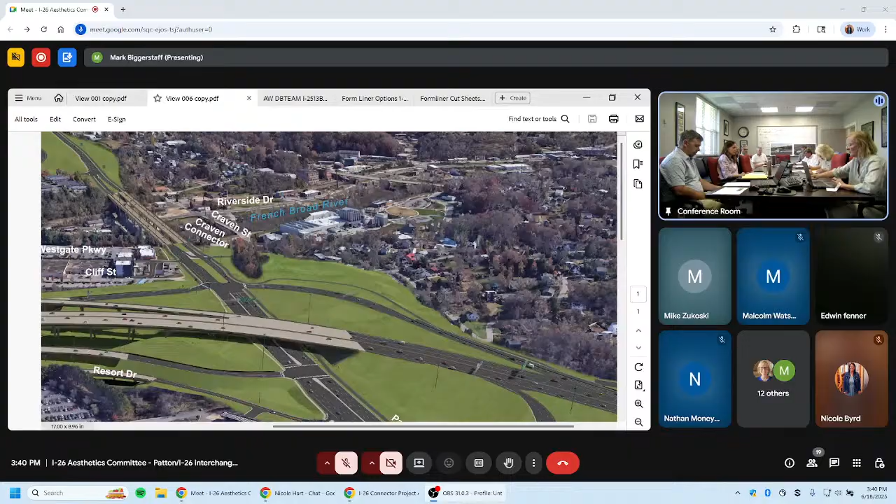He says it's basically a laser cut scrim in front of the beams. So I wanted to pull that up, have the committee take a look at it, have NCDOT and Archer Western react to it and see whether that is something that is a potential without too much cost.

Hold on, because I had Mark's got Jessica's thing, so, Mark's got, okay, it's good, here. Okay.

To clarify, those pictures were in the Archer Western joint venture proposal under the documents describing ATC 4, which is the big one, the flip where they were. There's about 30 pages around ATC 4, and this is one of them.

My question on this is, I think I understand what laser cut is, but I'm not sure I understand what a scrim is. Is that chiseling into concrete? I have no idea. Are you familiar with that? No, I'm on the same sheet of music as you on the terminology.

If I would interpret it the same way as we had the unofficial discussion, I think it's laser cut metal. That's how it looks if I was to build it, that's how I would do it. You blow it up a little bit for us.

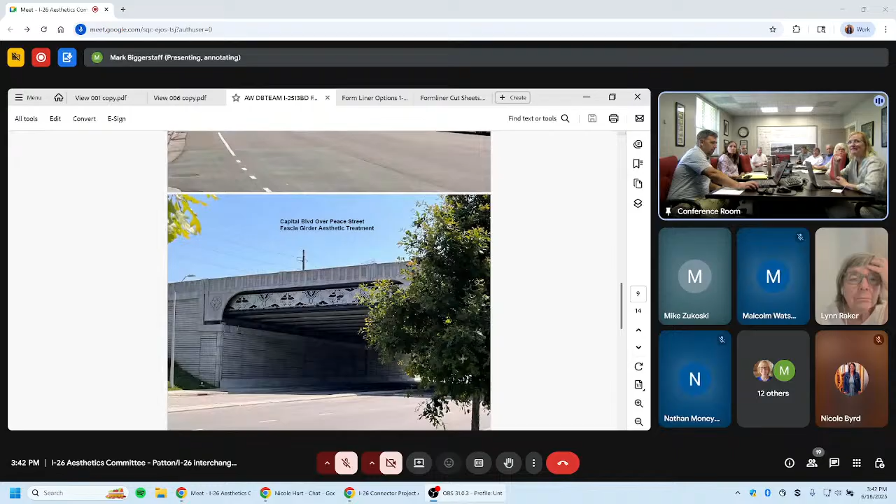So the intent there, and how our AJ designed it, I can't speak to since I wasn't involved with the process at that time, but as intricate as that is, it would have to be CNC laser cut. I'd do it out of some kind of aluminum, maybe, and it would be bolted to the exterior girder or hung in some form of fashion.

Okay, so almost like a skirt, a design skirt. So would that change anything about the basic kind of structure behind it that we've been discussing, in order to do something like that, assuming the city wanted to do that? The simple answer is no, if we're only talking about what I'm calling the metal work.

There's a lot of elements in that rendering right there. I mean, the whole thing, obviously we wouldn't necessarily be adapting this design exactly, but looking at the whole thing, what is it that we would need to do structurally in order to make it possible to have something that looked like that?

Those cheek walls are custom, the ones going down to the left, where you have that medallion, I'll call it, on the left, right? You're already proposing form liner on that exterior wall right there, so I think you're already addressing that.

So it's more like bolting that metal to the girder, which, if done the way I'm describing, would not have a big structural impact. We're not talking about doing anything in the girder yet, this is a new idea. We're only talking about the, I love it.

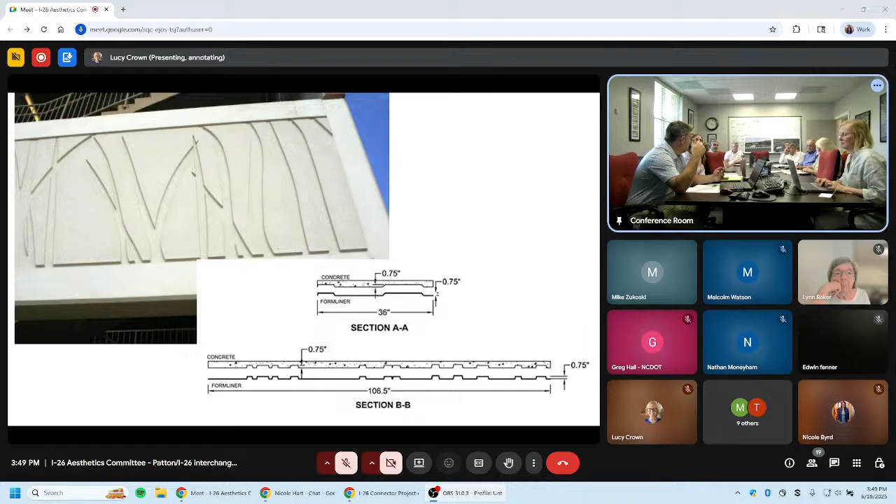Before we get into them, there are some stipulations I'll hit on, but I found out on the barrier wall we can't adjust the height, really any, because it's a design-standard tested barrier wall shape. So 42 inches is what you got. It's not a complication with any of these you've chosen - 1.5 inches extra thickness is all we can do without getting into structural changes with the bridge design. But my understanding is these 5 are good from that aspect, so we got pricing on them.

I don't know if you want Span B, the total Span ABC, or I can go through - basically what I've done is taken their pricing for all 3 spans, pulled out the 235,000 that DOT had estimated for our standard with stain, and have a delta, which I think is an important number to y'all. Most likely Span B covers the extent of both lanes - yeah, Span B, you basically have a bridge column on each side of the Patton, and Span B is that section between those 2 columns.

I'll just start with ABC because that's the 235 reference. The Western Range Grass is 283,364 total, so that's a change of $48,300 more than the standard for all three spans.

That would be the city's obligation, are you saying? Yes, unless it's a contingency item - never mind that. Arizona Zigzag is 17,947... that one, again dealing with all three spans, is a complete switch-out of this pattern instead of a standard for all three spans. It's $32,500 more for that pattern.

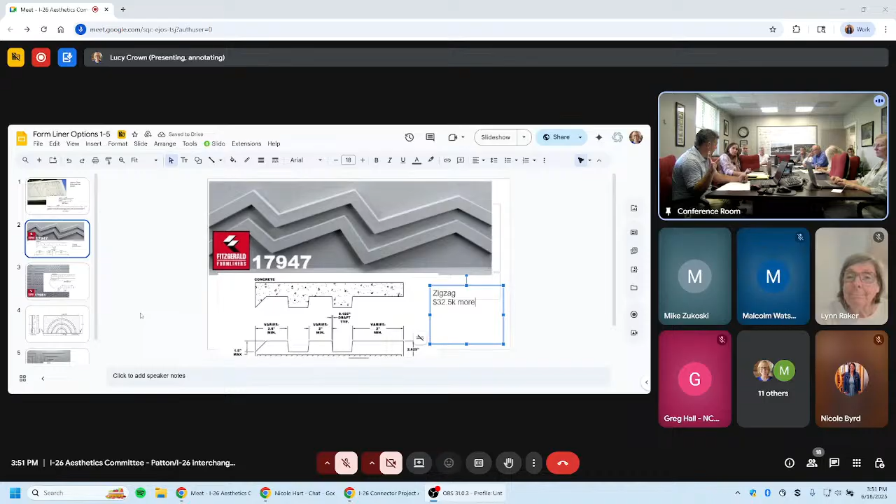That is not with a stain on these patterns. I've got a separate number for that, but didn't know if y'all would go with a stain or not, so we've got it separate.

17951, California Art Deco. That one is $75,400 additional. You have expensive taste, Ted. Yeah, what's this one called? California Art Deco.

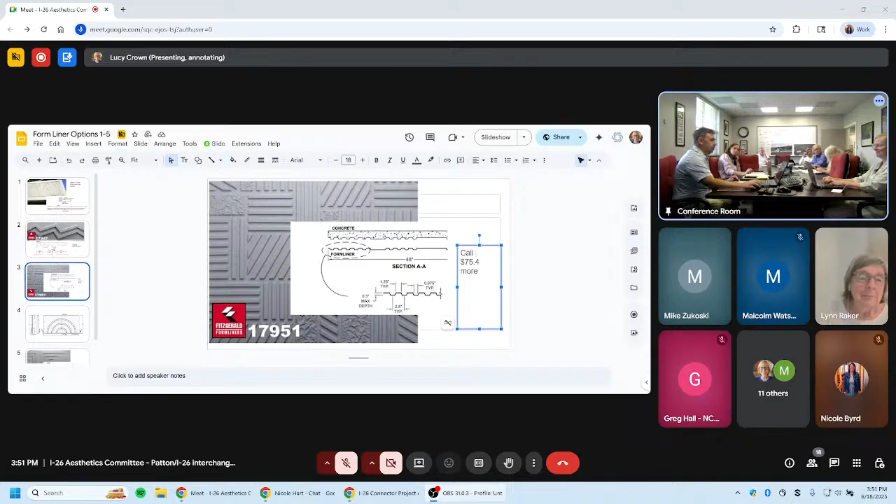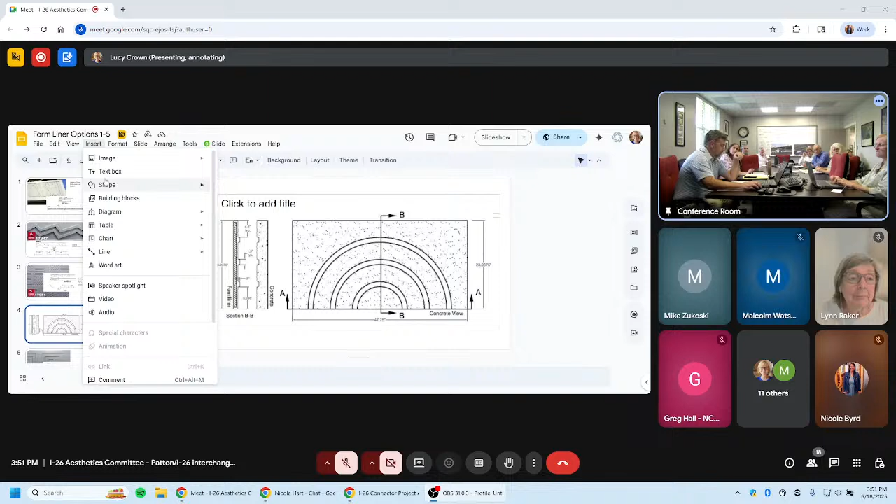And I've got some cut sheets that the contractor pulled with these that are a little more detailed than this, I can send over to you. Buttress swirl, that one the additional cost is $34,600. And I'm rounding some to make it easy.

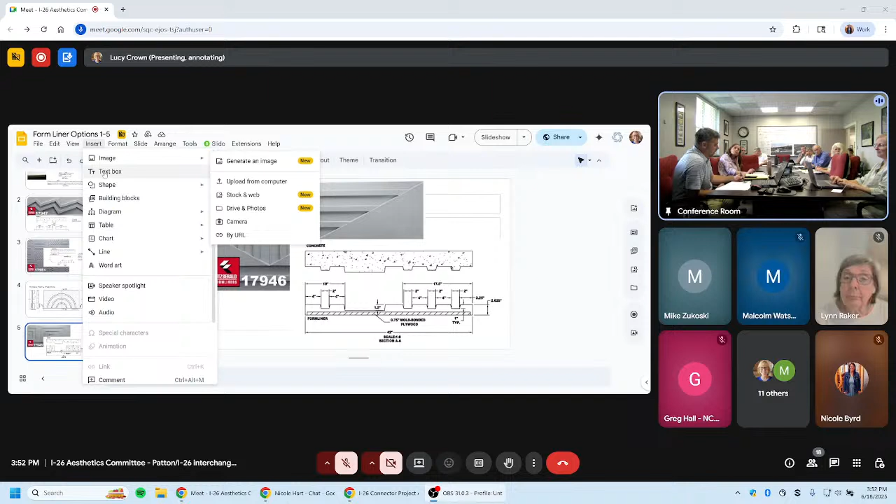And that one is $74,400 more. Could you repeat that? 74,400. Does this one have a name? Yes, Arizona Santan. Same thing.

So the 2, 3, 4, and 5, that's for all three spans, and the first one was just for span B? All the numbers I've given are for all three spans currently. Okay, just that's, I guess, worst case in my mind, dollar wise. So we're looking at 32.5 to 74.4. Right, yes, 75.4.

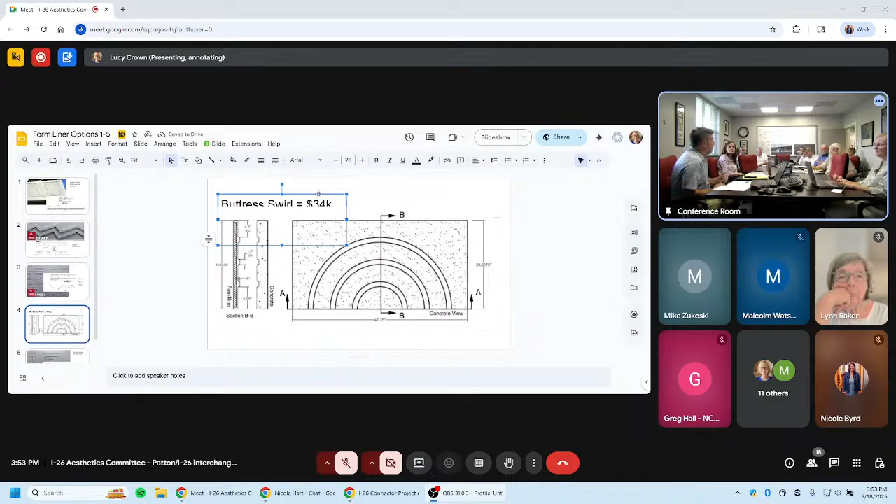And we might want to walk back through them. There are some things that the estimator pointed out due to some of the stuff we talked about before, as far as the differing heights of the panels and how they would fit on the wall. And now that we know we can't make the wall taller, there are some how-it-actually-looks aspects on a 42-inch wall that you might want to consider.

Yeah, with this, well, you've got Buttress Swirl, I can hit on it. That was only 24 inches, so that was the one you talked about as far as either having a narrow strip of it, or that's a price for one set of panels. So if you start adding a set to stack like some we're talking about last week or anything else, that price would grow, but that's one set of those panels replacing what we had. But other than that, there's really no complications with that one.

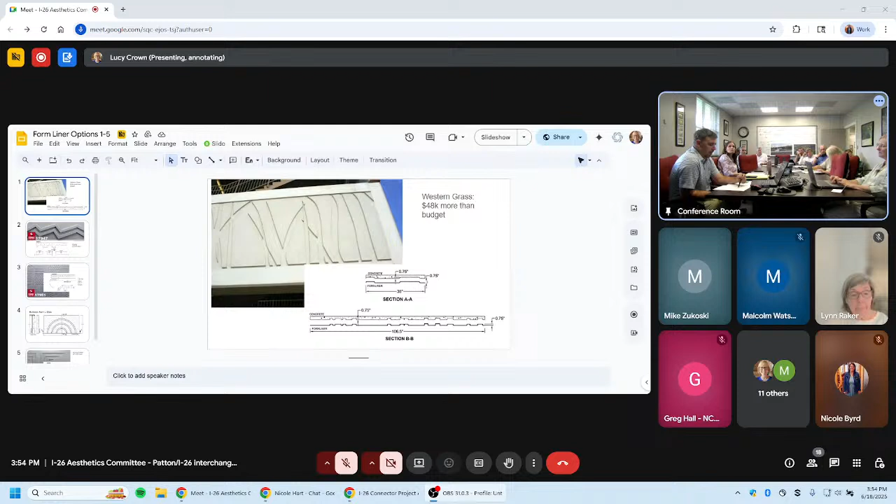The grass one, he really had no comments on it. It's just noted that it's 36 inches tall. So that's a situation where you're going to position it somewhere on that wall and you're going to have smooth surface top and bottom.

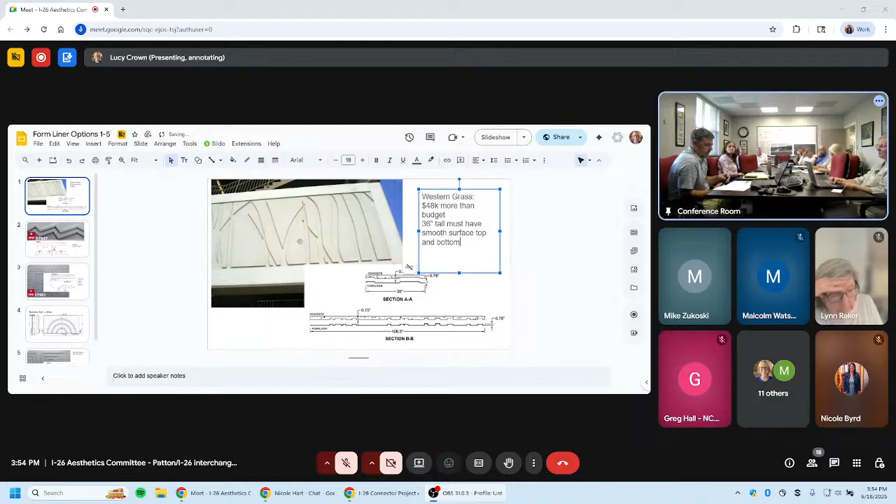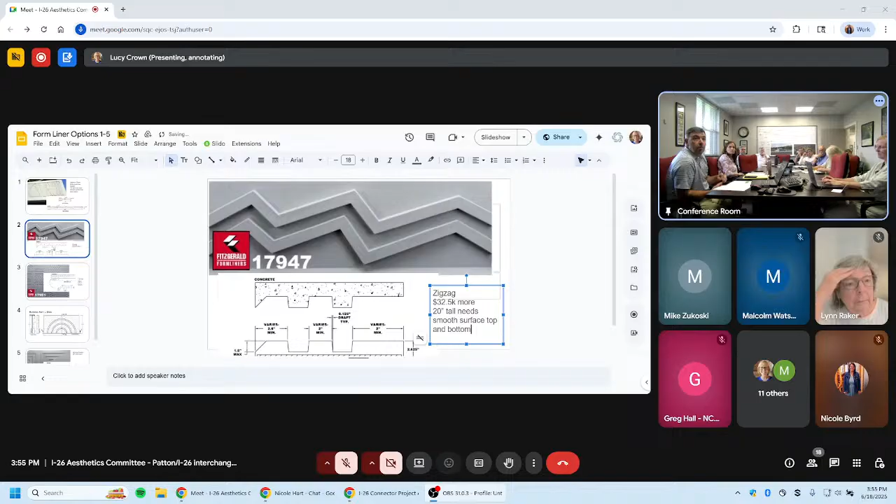And similar with that one, that was just 20 inches tall. So what's priced is one set of those, one zigzag pattern on the round.

And hit the Art Deco one. That one's 48 inches tall, so I think we talked about some last time, you're going to have to cut something off. So does that impact the pattern and wear is a consideration with that? I believe that's only one of the five that would have to be cut down.

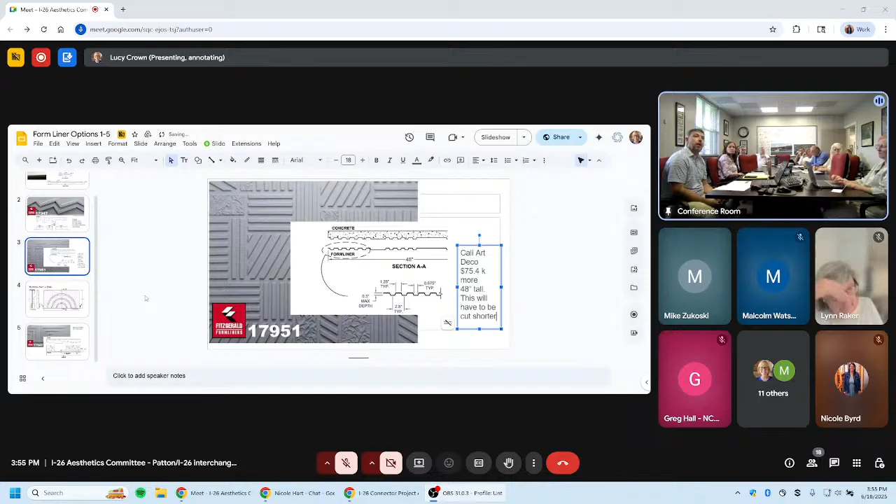And then the last one. Talk on that. The last one, why is that one more than some of the other ones? Is there, what is the thinking behind the cost, or what attributes to the cost? Dave can answer that probably better than me, but I assume it's just the cost

of that particular form liner itself and then coupled with extra concrete. Some of these that were chosen, and I don't have the notes in front of me, my assumption is this is a single-use form, so you have to buy a lot more form to implement that pattern for the length that we're talking about. Some of these other patterns we get reuse out of them, so they can be set in the form as we progress pouring the concrete.

So there's a number of nuances here that we could get into more detail, but I would suggest if you select a specific pattern, we can go into the details of why, what's driving the cost. Okay, but each one has a little bit different nuance along those lines. But the biggest cost driver is whether it's a single use or we can get multiple reuses out of the same form.

Okay, I think this pattern here, the Arizona Santan, is a really strong looking pattern. It's clean, it's simple, I think it will age well.

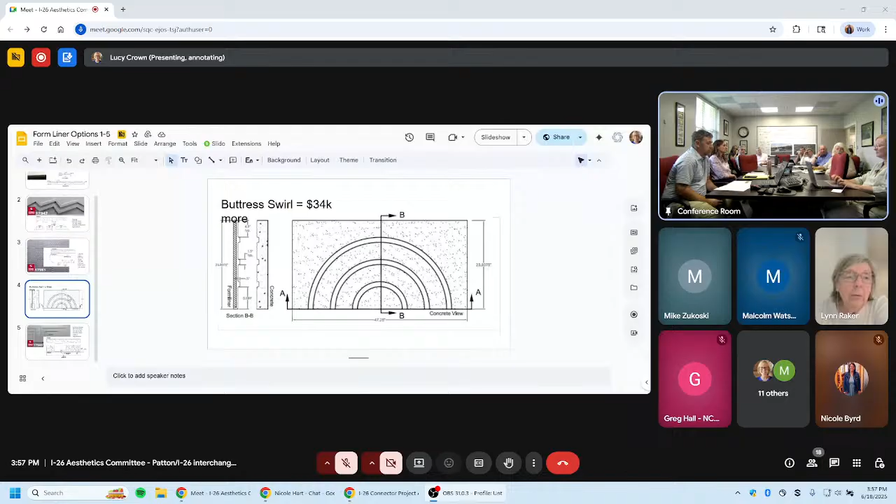And I think all of these costs, even though there's variation, they're well within the money that we have to allocate for these. So I don't think cost should be the determining factor here.

And Arizona is the only one that's by itself in there, correct? Right. You wouldn't have any reveal top or bottom. Right, that was a 42 inch tall panel. Set it right in.

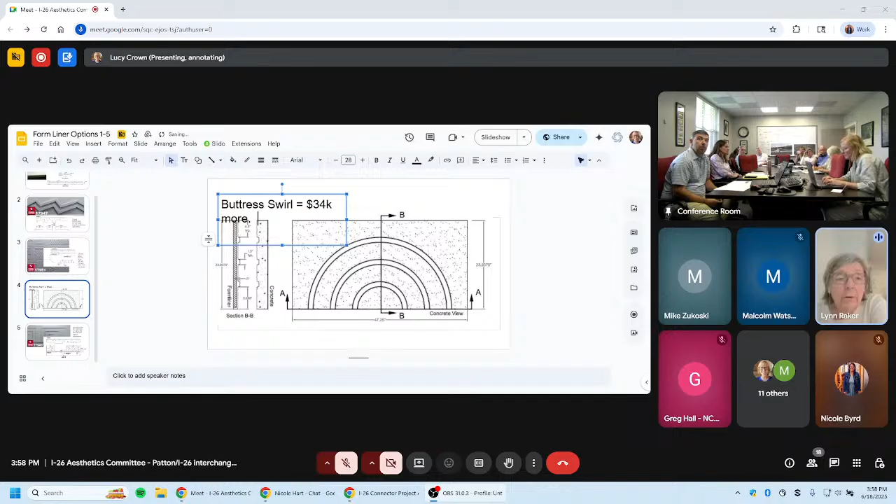There is a real life view of that one, the Arizona one, I think in the Fitzgerald catalog, that shows you more of a span view rather than just this little cut sheet view. Oh, great.

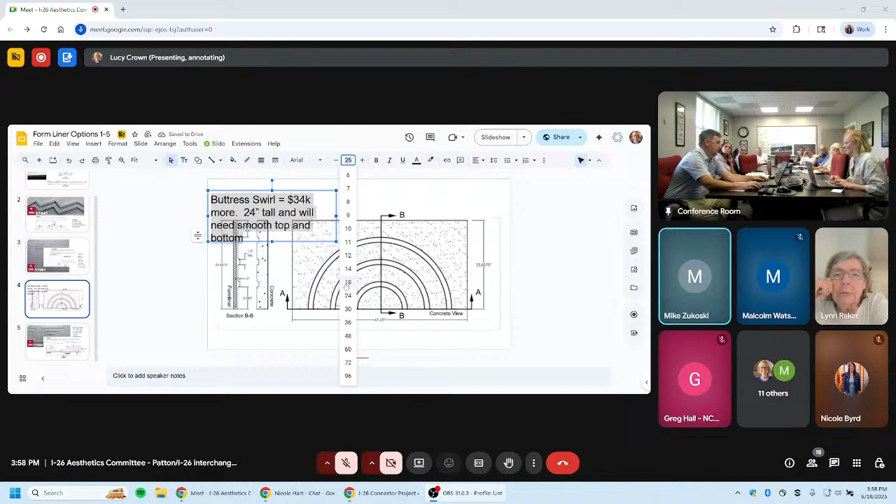Yeah, I think those of us who have looked at the catalog have seen that. I would echo, I would side with Mike on this, that of the patterns, I think this might be our best choice.

Yeah, I just wish we had something that was a little bit more indicative of the city, but of the choices we have, we may just not be able to do that this time.

Well, what was the anticipated budget for this feature, Ted? You're saying that it's within range, but what is it? Well, we have $400,000 to spend, that's reallocated from money that's saved from things that are not going to happen because of design changes east of the bridge, which the committee has reviewed and given approval to.

And this is definitely one of the major elements that we're recommending in terms of cost. So there's no specifics around that exactly. No, it's just that there is that money to use toward this project, and this is an important element of it.

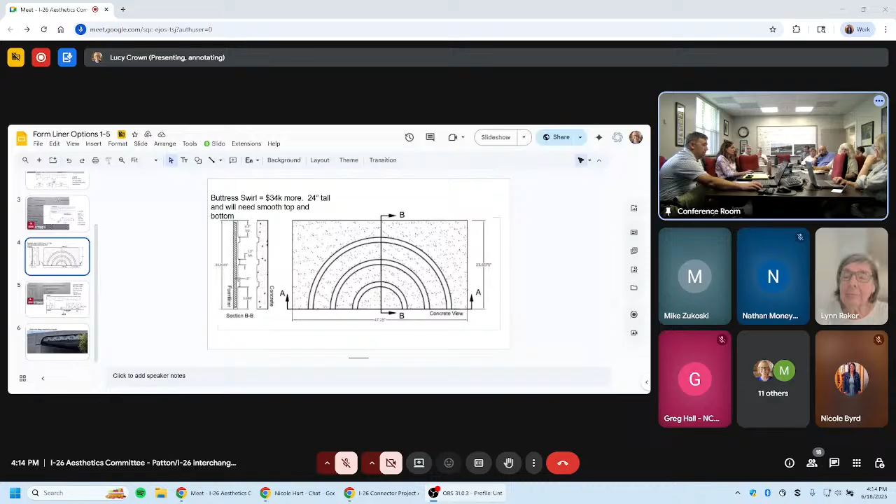Okay, let's address the scrim on the railing. Who would like to go forward with that? Lynn?

I would just be interested to know if it's possible, and it would open up other options for whoever was speaking earlier about having some artist involvement and that sort of thing. It also relates to what Ken was saying, having something that reflects Asheville better than just an off-the-shelf form liner. So that was my goal here with using the scrim. Plus, it's a little more unique than the form liner concept.

But Lynn, I just wanted to ask you a question about what you're saying. So the scrim proposal would be just as relevant to the scrim below the parapet wall as on the parapet wall. Are you just proposing that it be mounted on the parapet wall to avoid the issue of it being trademarked or whatever? Because it doesn't sound like that's a barrier, it just means we might have to go through them.

No, that wasn't the issue. I was just thinking that if this was not the one that they're showing, it might not be feasible in our construction.

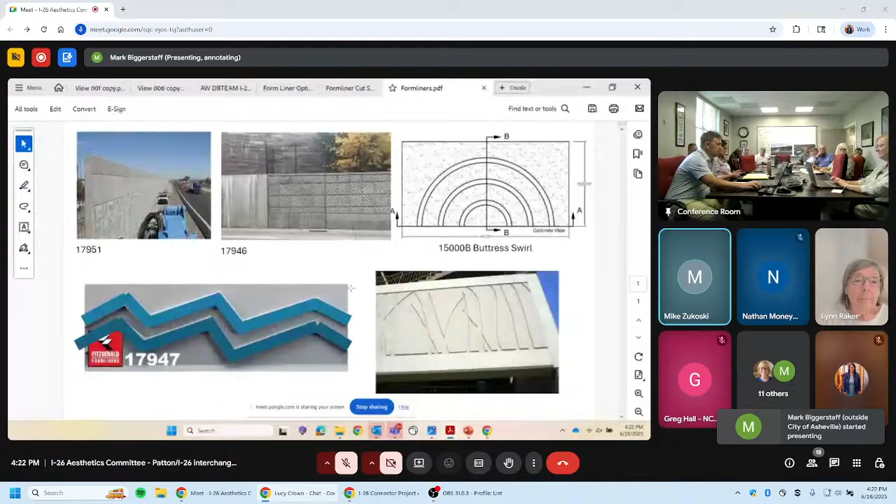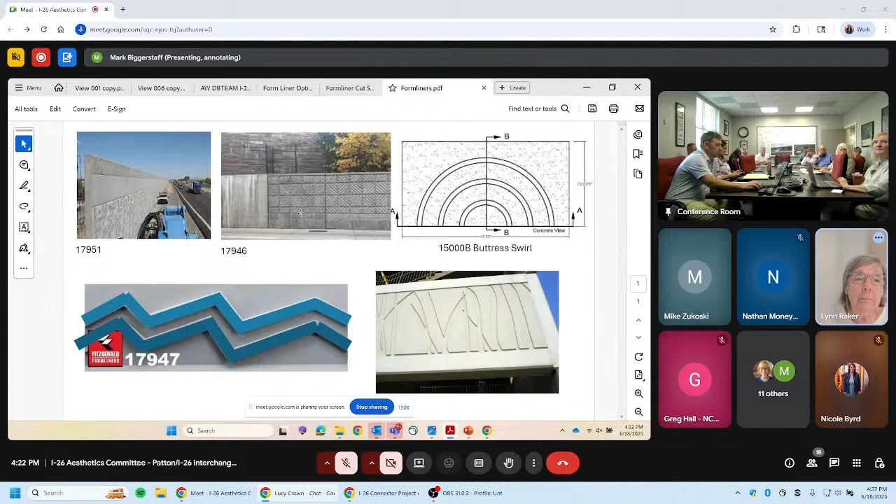Okay, so this second one, 17,946, that's the one that's on our list, so you can see a little bit better what it's going to look like.

Does that look like any of the ones we saw before? Yes, they are. I couldn't find an example of that arched one, but I don't think we're considering that at this point, the buttress one.

So the first one is the California Art Deco. That's right. It's terrible, you can't see what it looks like at that angle, but it's all I could find.

Keep in mind it's going to be a lot thinner application. A lot thinner, you mean shorter? You're only working with a 42-inch tall surface. So how many of these modules do you think we'd get on it?

Just maybe two? This is the pattern you'd get on it, because it's just the single, we're doing the top. This is what the rail would look like effectively. But that's not that design. Right, it's different.

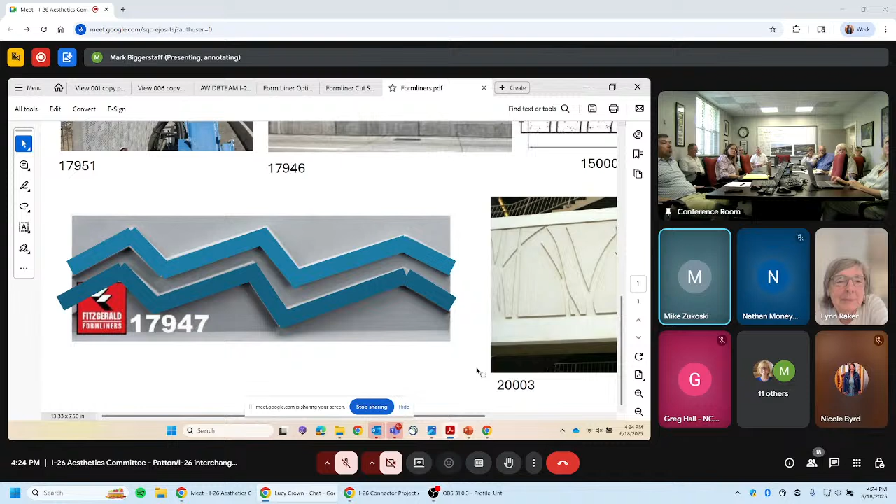That's the one that's only 20 inches. Do you have the other one that we were looking at, the preferred one at this point?

Lynn was thinking it is this one, but I don't think so. That doesn't... that's the same number out of the catalog. How they stacked them.

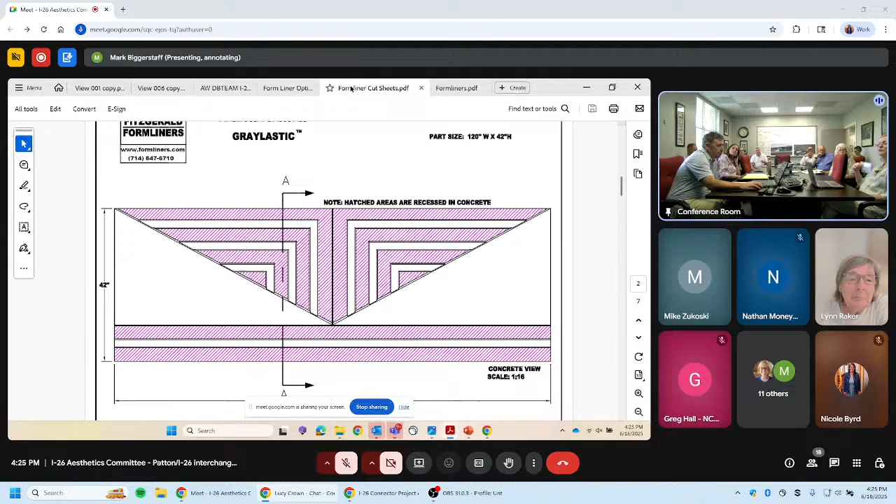So last meeting we saw it with the flat, diagonal surfaces that made it kind of look like a mountainscape. That's what piqued their interest.

I thought you should see this. I'm assuming because it's the same number, that's the one we're looking at.

I don't think that will work then. No, I don't think anybody's really excited about any of these at this point. Maybe it would be best to table it for now and see if there are more possibilities we could find.

Well, we could, but doing a custom does seem to be an option. Yes, and we may need to have a backup from one of these form liner designs that we've chosen.

We can look some more, but I think we looked pretty extensively and these were sort of the ones that we found. Committee members are welcome to look some more.

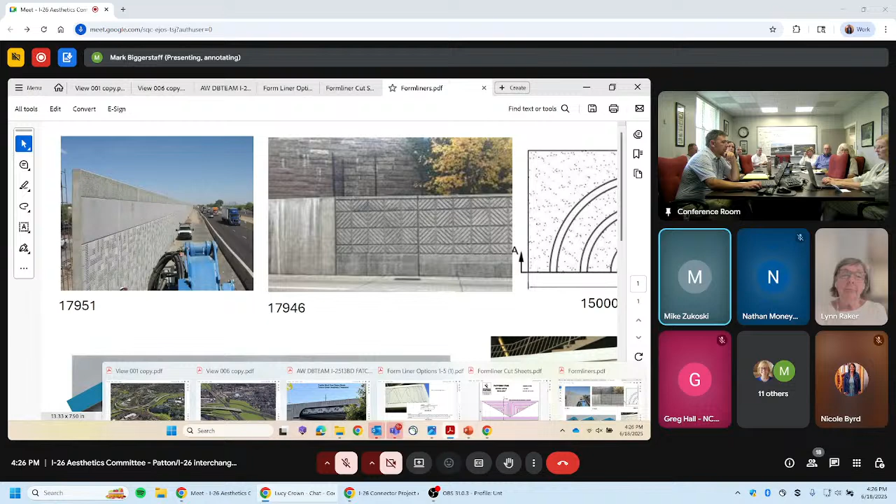Lynn, can you put up that slide, or whoever has the slide that had the laser cut metal skirt on it? Yes. That one, Mike.

Is the area above the skirt a form liner? Because I think that would be better than most of the other ones we've looked at. Does anybody know in the industry if there's something similar to that as a form liner?

This sort of classical looking thing. I think you could find a form liner that represents that, though whether it would look exactly like that I can't say. This has some other elements where at the joints they've got some kind of buttress column that would not be part of a form liner.

I would think that pattern, just guessing, is probably there's something similar to that. I don't know which catalog it is, but something like that harkens back to the history of Asheville and the age. Also, it won't go out of style like some of the other form liners. Some of them look contemporary suburban, and something like this might look less contemporary suburban.

Mike, I agree in principle. I've looked at some of these form liners that are this kind of classical look, but to me it's too faux - it's like the brick is kind of really faux.

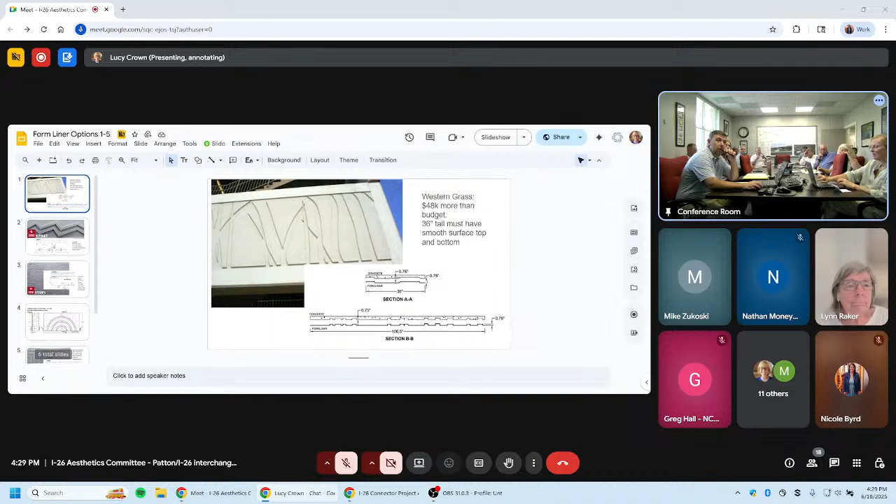Can we go back to 4.6? Which one? The one you just had, not that one, but the bottom one, the 42-inch one. Yeah, that's definitely a triangular solid piece in there.

Yeah, that just does not look like what was on the bridge - that's different. Why do you not think it looks like it? Well, for one thing, the bottom triangle is solid, and it's only the top triangle that is the groove.

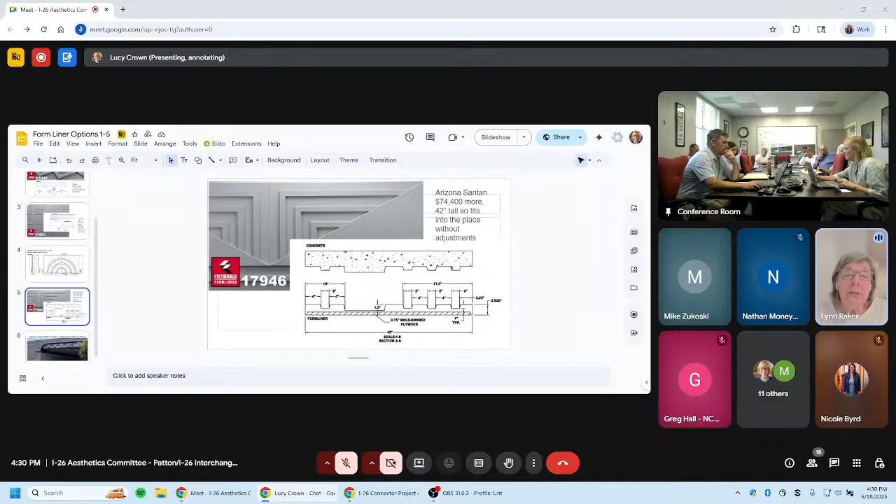Right, and I thought about that too. And I thought, well, maybe in this particular application they're trying to achieve a more intricate or specific design, and they're using this basic 4-6 as the background and adding that solid triangular part as part of the design, because it coincides with where these two blocks join at the lower apex - or reverse apex - of those triangles.

So I thought, well, that's what they've done here. Didn't you have the mold up earlier? Hard to say - form? Yeah, they can show it's just a different picture of the form itself. You had an image that showed the actual mold, that showed the triangular piece, the blank piece as part of the mold.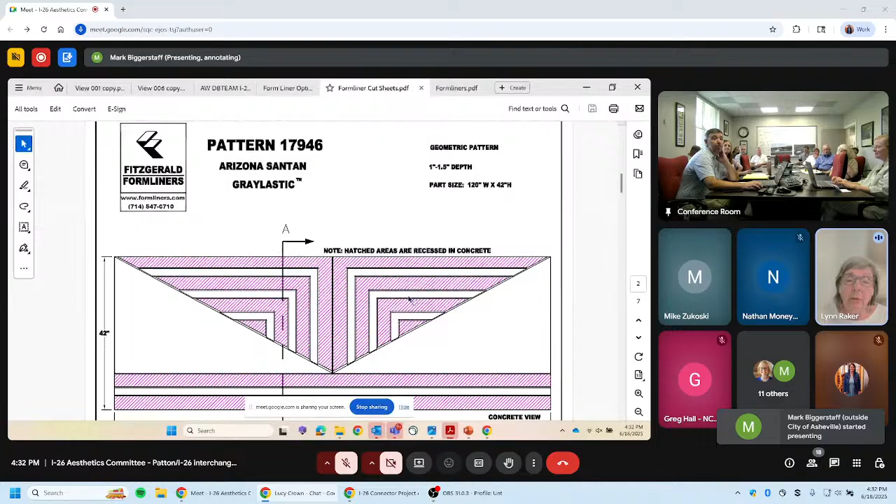Can we take a week and see what kind of sketches we could come up with that are more Ashevillean in nature, and whether or not it's feasible to have a custom form liner? Yeah, I think it's feasible to have a custom form liner, but yes, we can continue this discussion next week.

I would like to suggest that we do have a backup off-the-shelf form liner. I would go with this one, but we can table that discussion for next week as well.

Seems like there should be a mock-up of some kind so that - yes, I agree, that's what we need, some mock-up - that seems like it would be required in order to make a decision. And that should be easy enough to do.

Can NCDOT or Dave, can your group put that on the side of a bridge so we'll see what it looks like? That's a question for Mark. Mike's got a question for Mark too. I don't know - Mike has his hand up and he may be answering the question. I mean, I'm sure it's something we can do.

How realistic is it going to look? I mean, the renderings we produce - I don't even know what system they're using, but I don't think DOT designs in a graphic modeling realm to where I know other people who put their own renderings together can do stuff faster and honestly better than the systems we're using.

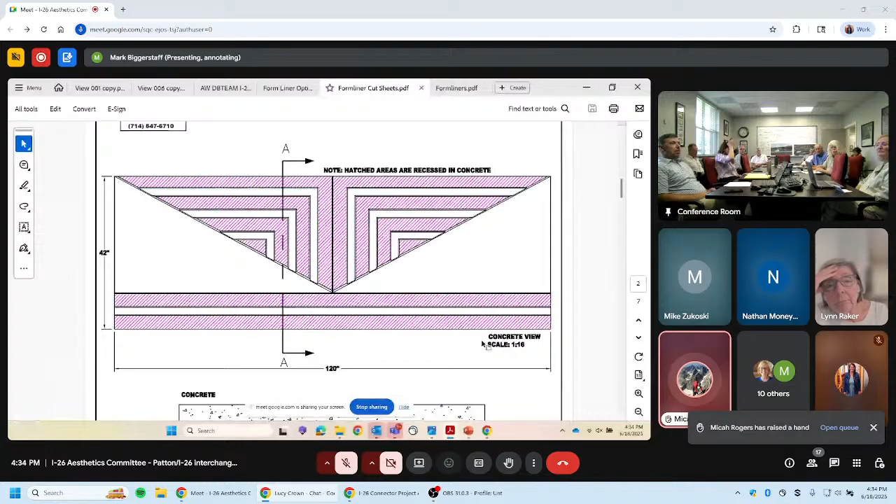Mark, can you send me just a typical side elevation? Do you guys have one? Yes, I mean, we don't have the PGD yet, but it's close. That's really all they need. I mean, honestly, yeah, I know we have 27-foot clearance and the girders are what, 84? Is that what they are?

Yes, what I saw. Okay, so I mean, if we're drawing it super basic, I can draw a rectangle that has a 27-foot clearance, an 84-inch girder, and then a 42-inch parapet with the embossing on it pretty darn quickly, if that would help out.

That would, thank you. Yeah, give me a day to track down, see if I can save you some steps. If you could give me just a base image, especially if they could send me a DWG file, that would make my life so much easier. But I'll be happy to do that for the committee if that helps.

What kind of file is that? From DGN. Yeah, a DWG AutoCAD file. Yeah, I think there's capability. They're working in MicroStation, which I think uses DGN files, but I think there's some compatibility across the platforms.

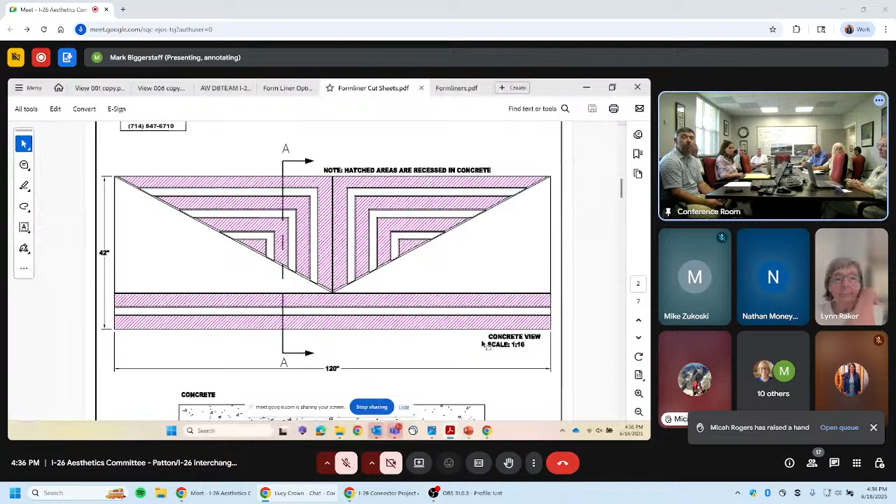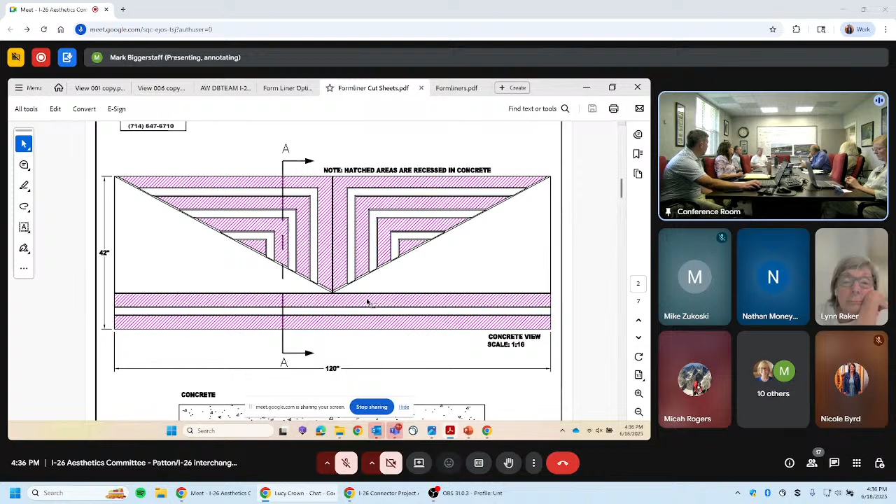Cool, appreciate it. Are the breaks the joint directly above the bent? I use the term, yes. Only on the second, not on the first. Yeah, where that truck is, there's a joint. That's a joint. Okay, and there's one at the end bent. There'd be a construction joint, a cold joint. There'll be a joint, an expansion of the existing construction. But we told them.

Part of the idea is that when you saw that picture from Joe, it was obvious that somebody paid a lot of attention. They knew where the joints were. They brought down the knee wall. They've got the medallions in there. In other words, that was designed, not just formwork. I don't know, I think we might want to be going more in that direction than just pickup form, but I don't know. If you look at that picture, there were design elements in it. Someone paid a lot of attention to how to design a bridge that looks good, and they patented it.

Okay, we are going to move on to the next item of unfinished business, which is the underbridge lighting. And Mark, I thought that you and Greg had...

We do, Greg, do you want to cover it? Or you want me to try to cover it if I can? Yeah, if you don't mind sharing, that might be a little bit easier. You want the PowerPoint? Yeah. I can pull up the other stuff I need to. I think I can go with presentation still. Sure. And he said PowerPoint, but this is not a presentation. This is just an easy way to put together some stuff to show what it looks like.

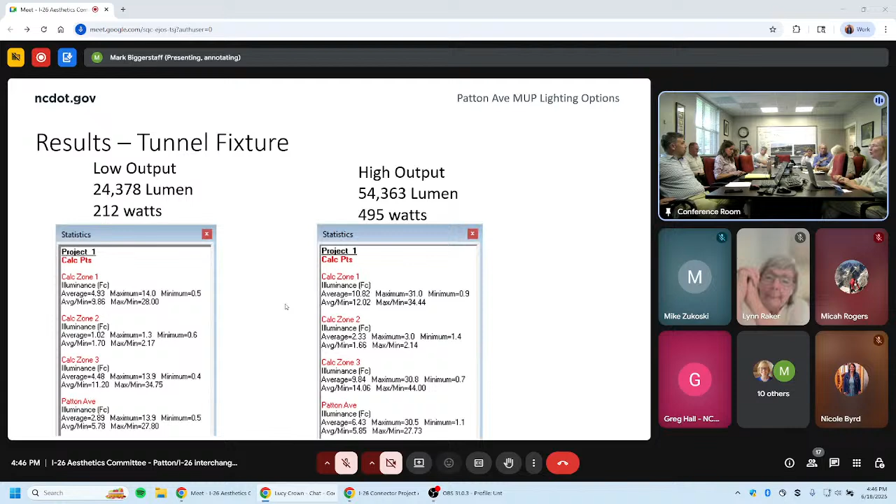Yeah, I mean, I think your color-changing LEDs are going to be more up in the girders anyway, based on what we looked at for Trade Street in Charlotte. Is that the way you're leaning, or are we talking about trying to aim towards the ground too? No, I'm just wondering whether or not, since this is a pretty bright light...

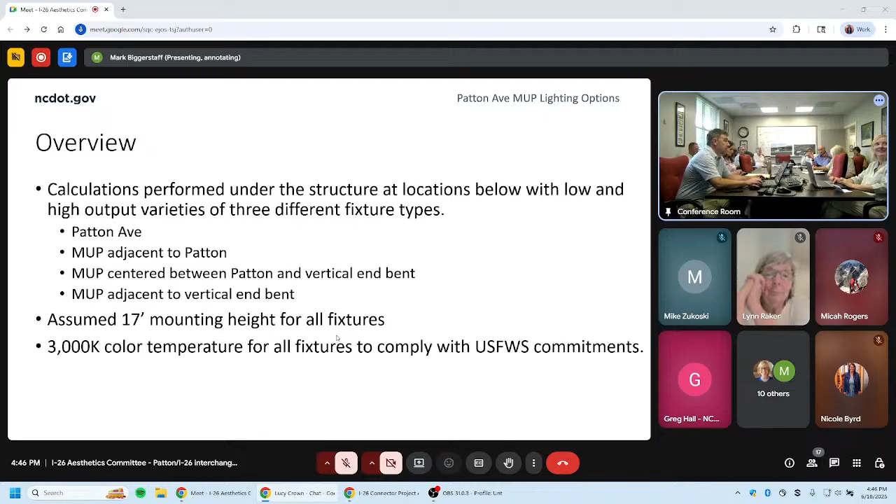If you have this underneath the bridge as your standard lighting and it's on all the time, and then we add these LED lights for color, whether or not this is just going to pretty much wash out, cancel the lights essentially—that's what I'm looking at.

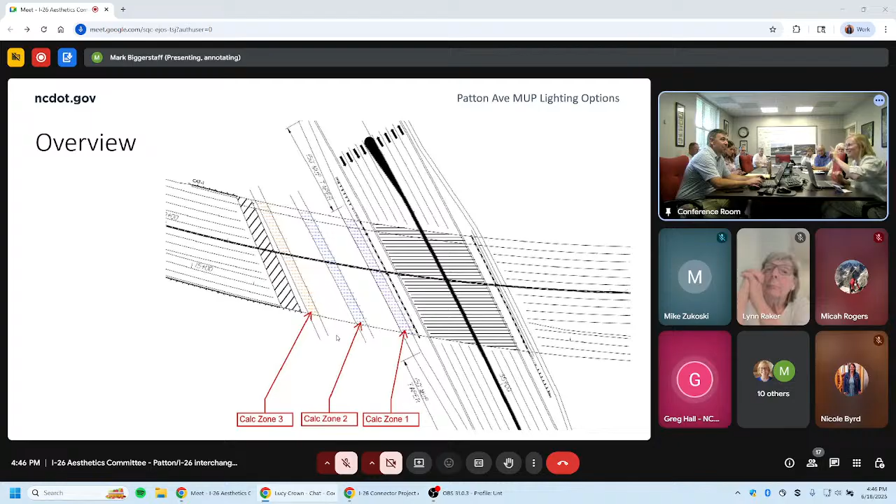That's all. Yeah, that last fixture probably, that high output tunnel fixture, yeah, probably would. I can say that, yeah—that's what I'm thinking, is that it probably would reduce the effect that we were looking at in adding LED lights. That's all, that's not, you know.

And that one that I had labeled as contemporary, that is a cast-down fixture. So it's only going to throw light down. It's not going to throw it up, and it's not going to throw it out all that far.

Okay, so you may want to lean towards something like that if you're going to go with the color changing. Yeah, that was my question, Greg.

Isn't it 150 feet that we're trying to light between the fence and the abutment? 125, and for that 125 distance, roughly 154 is the other direction. Okay, so distance from one side is 125 feet to the other.

Trying to do that with wall packs—the wall packs have to throw half that distance or more. That's pretty tricky. It seems like, just in itself, you would be forced to use some downward-facing surface-mounted fixture over the MUP to get a lighting level on the MUP.

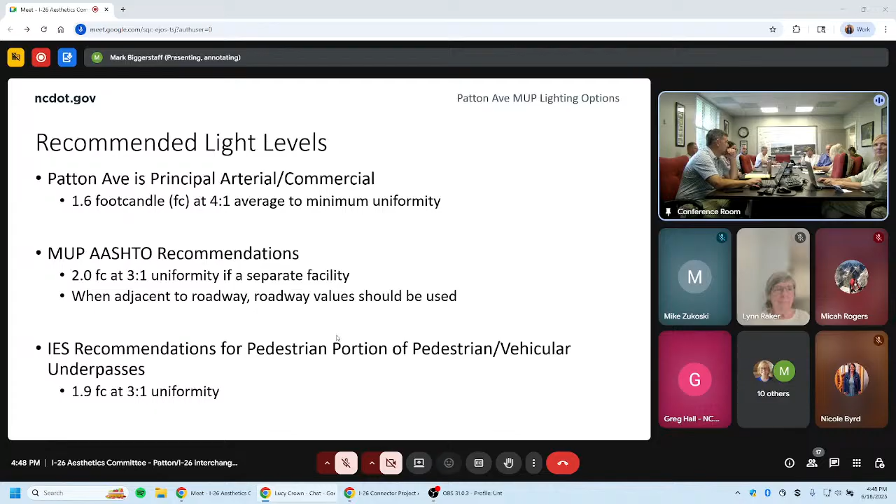You're trying to achieve a constant 3-to-1 anyway. If the design you did is only achieving 1.9 with those designs, that's still very, very dim.

That's what I didn't understand - you're trying to achieve 1.9 in your design? I'm trying to, yes. And again, what I said earlier, this wasn't a true design, this was let's throw some stuff down and see what the numbers look like, just for comparison purposes. Yeah, and then we can move stuff around as needed once you get to the design.

My comment is 1.9 - I mean, the scariest shopping center parking lot you're going to walk out to your car after close is lit from 3 to 5. 1.9 is still pretty dark.

Is this 1.9 with bollards or without bollards? This is without bollards, just the DOT section of the lighting. This is not the bollards, and so with the bollards at surface level, I think you would be well above 2 and be pretty safe. Yeah, we don't have any photometrics on those Monticello fixtures, and we don't know.

We can adjust the density underneath here, we can add more of them. Right now they're only at 115. That will be the committee's recommendation - that we have a generic 1.9 and then worry about the Monticellos coming in along the path. That's a very good idea. Do photometrics so I can drop those fixtures in and see what it does.

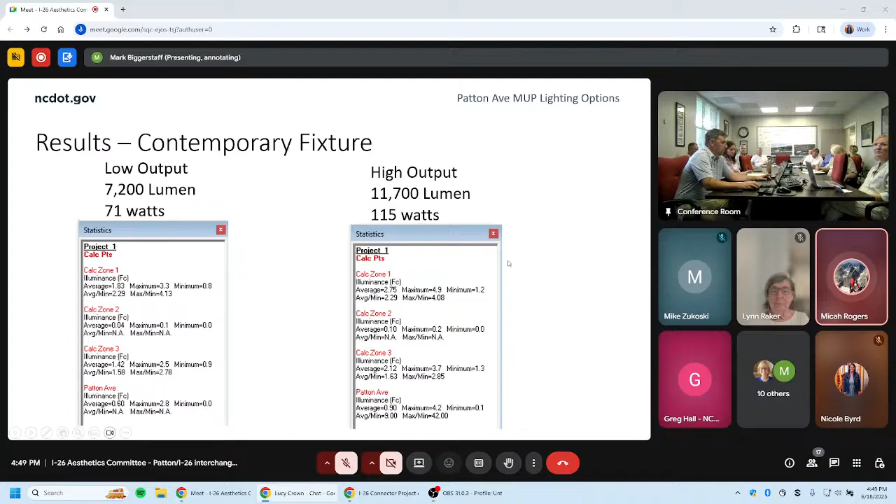Micah, did you do some work on this as well? I did a super basic level layout. I emailed it to - I'm trying to think, Nicole should have it. You should have it, Sonia, Mark - I can forward it to you. I think I've got it, hold on one sec.

Okay, yeah, mine's super basic because I didn't have any of the technical stuff, and I'm not a lighting engineer by any means. Greg knows about a million times more than I do, but just based on what we talked about, I counted up the girders and threw those in for the packs, and I didn't put them on the wall on the abutment, but I did put them everywhere else. I came up with whatever the plan says, 76 of them, 78, but it'd be more than the 60.

But I did throw in kind of a rough MUP path if it were to meander, and then also just some ceiling mounted lights that could either be put in right now as the down lights or future decorative lights.

If one of you guys wants to share it, I don't know if I can share it from my phone here or not. I'm getting it, give me just a second, Mike. Cool, yeah, there we go.

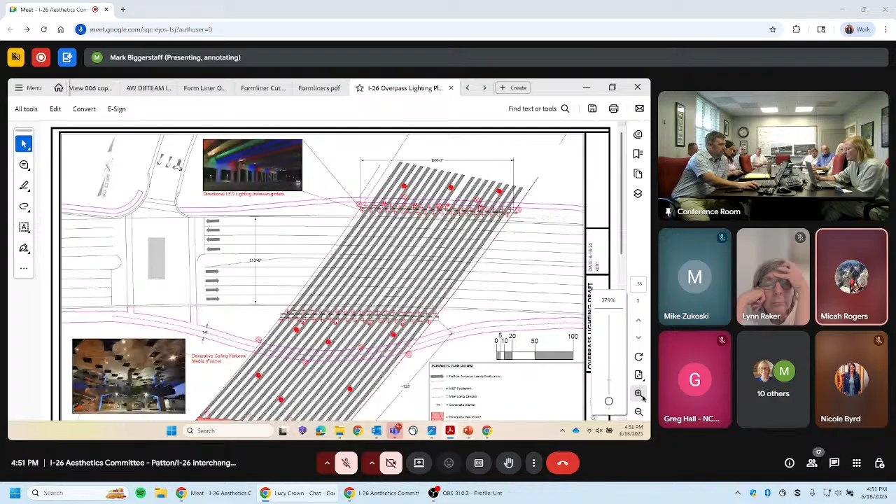So yeah, basically, I did this as a conversation starter. If you zoom in a little bit - I know it's kind of hard at this level zoomed out - if you zoom in, I did wall packs in between the pillars on the outsides, basically facing in towards Patton and also in towards the MUP.

And then the idea I had is that we could supplement that with some uplights on the pillars. That was one question I had for you, Mark - do you guys know yet on the design how many pillars there are going to be holding up the girders? If there's - I assume it's 4, seems like that's kind of the going rate. Yeah, I can check, I don't know offhand. So anyway, I drew 4 uplights there assuming there were 4, but if there's 3 pillars, then 3 uplights.

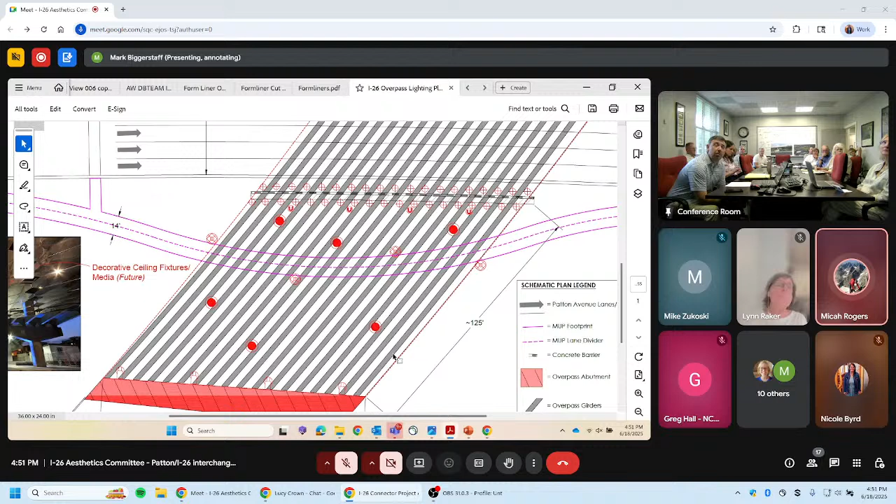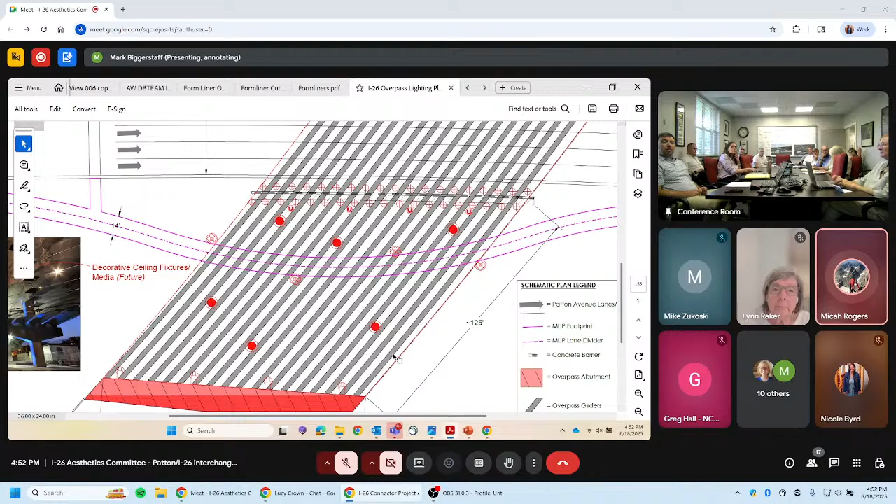The idea would be that you could uplight from the MUP to kind of get rid of all the downcast shadow work, and then the bigger, darker dots would be the ceiling mounts shining down. I staggered them so they could be a little creative and also loosely follow the path of the MUP. The only thing I don't have is a wall pack on the abutment side, just because I was curious how far it would cast back given construction - Greg would know a lot more about how far it will throw each direction if we need them on both sides.

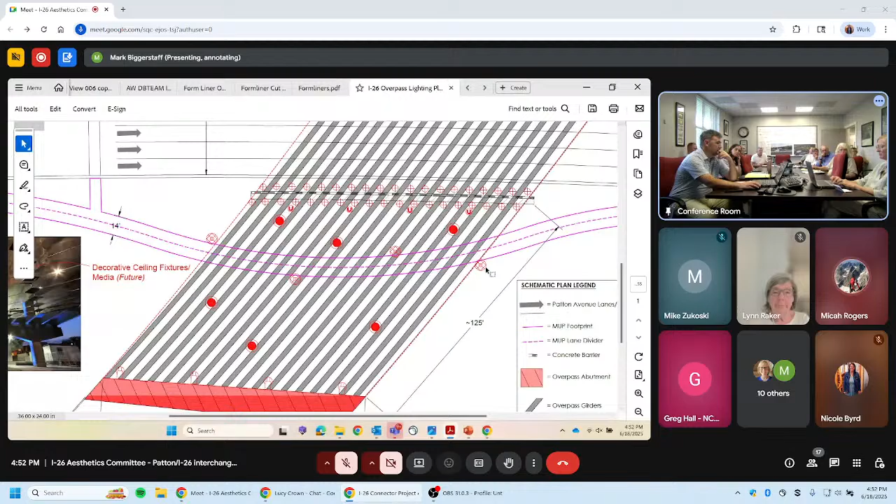Okay, and are these the pole lightings? No. Pole lights, there are 4 of them shown. They're right along the MUP, staggered 1, 2, 3, 4. I did 50-foot spacing basically on them. Okay, good.

Now, I can take this design that you've got and run it through our photometric software, and assuming where this path is shown, do some calculations directly like you've got this design laid out. I can do it with the pole lights like we're talking about. I have Duke's photometrics, so it's not a problem to drop those in. And then we can look at the different wall pack type options as well, leave those in and see what numbers come with that.

Yeah, that would be awesome if you don't mind, Greg. I guess the big question on my end, I dropped in that MUP really just as a conversation point, and it doesn't have to be where I drew it by any means. It used to be right along Patton, and I kind of kicked it into the area slightly, but I'm totally open to anyone's layout ideas. Change anything you want to on here.

And the lights that are shown along the retaining wall, those would light up that wall. So if there's a mural there later on, that lighting is going to light that mural up. Those 4 are just labeled as power spots, so they could be future lighting. The idea would be they would be lower, kind of shining up, not necessarily shining down. And again, the wall pack might be the one that we also need lights shining down from the top of the wall, down towards the ground. But I don't know that yet.

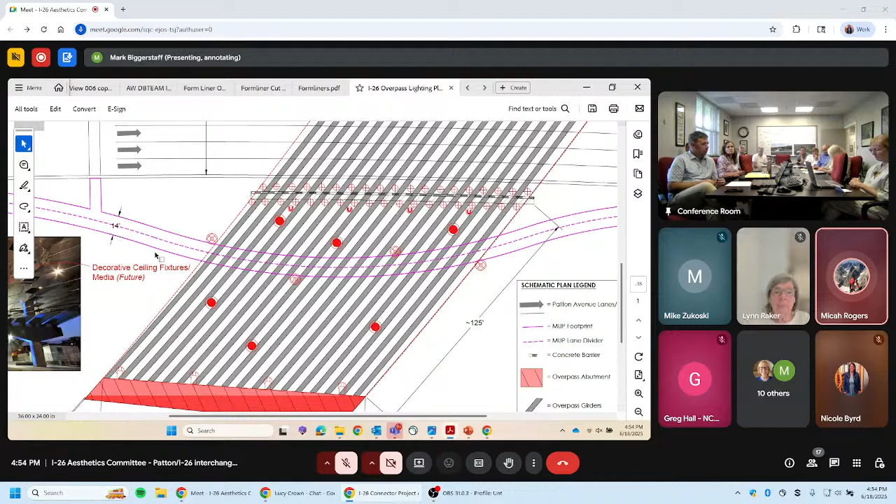So if Greg doesn't mind dropping this in his software, I think that would answer that question very quickly. Okay. Is there a desire to light the underside of the bridge for any reason?

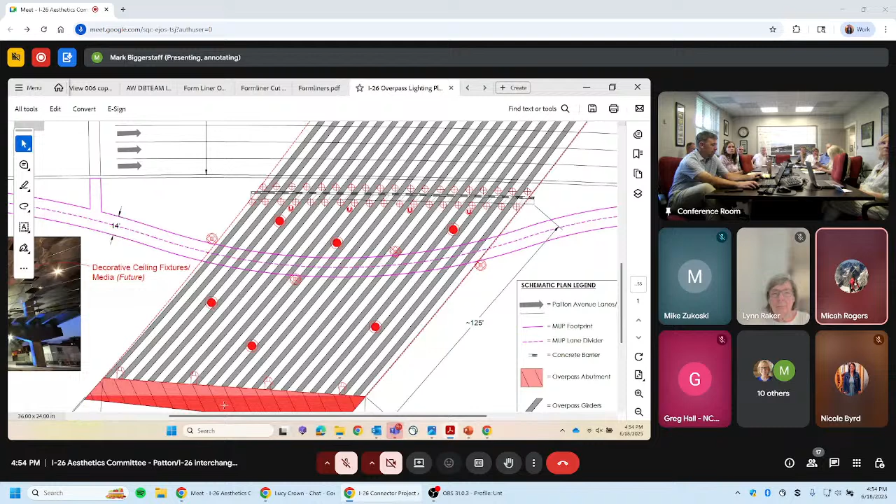I think there would be, if it's different colored - if you kind of pan to the left of that page, it shows some uplighting on it. The idea would be that you could create a little more dynamic lighting rather than everything shining down, which is fine. If you start to mix some lights, especially with different colors shining up, you get the idea of more of a dynamic space, especially if you're engaging the ceiling in this area, kind of like this park is. This park is in Toronto, and they used mirrored tiles, which is a really cool idea that I think we could run with further down the road. So that would be the only reason to do uplighting, is to create an effect like this.

Sure. Okay, thank you, Micah. Sure.

Okay, it is 4:55 now, and the next thing on our agenda is David's presentation on the city process for public art. I don't know whether we have time for that. It's fine either way. I know Sonia is the one that generally requested it. Sonia had asked and Councilman Tallman had passed it along, and neither of them are here.

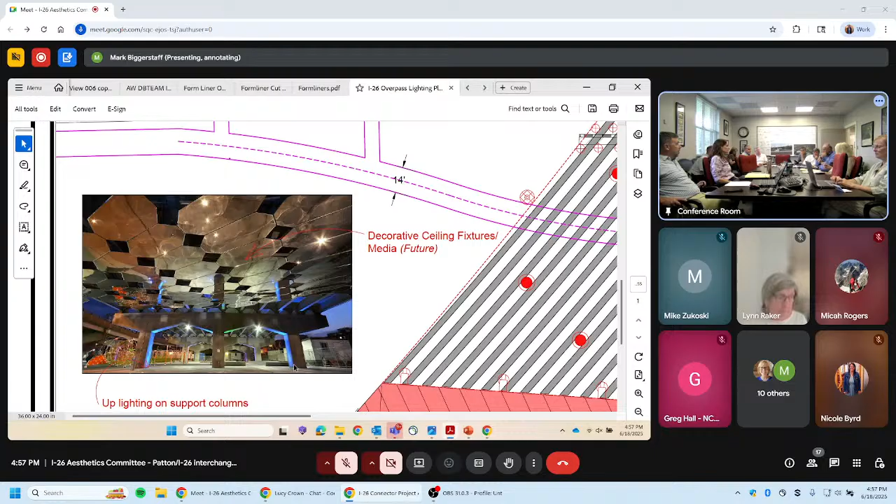Will there be a way for public art to be installed after the bridge itself is complete, but before the whole project is complete? Or does it have to wait until the entire project is complete before getting the encroachment agreement to allow the city to do that?

Normally on those, we wait until the project is complete, just so if we have to go in and do anything, we're not messing up what the city's trying to do in there. That's normally how we do it. We can certainly look at what's needed at the end, but typically we wait for the project to be complete, so there's nothing to interfere with anything the city's wanting to do, or impacts to it from construction or whatever. That's certainly something we can look at when we get to that point.

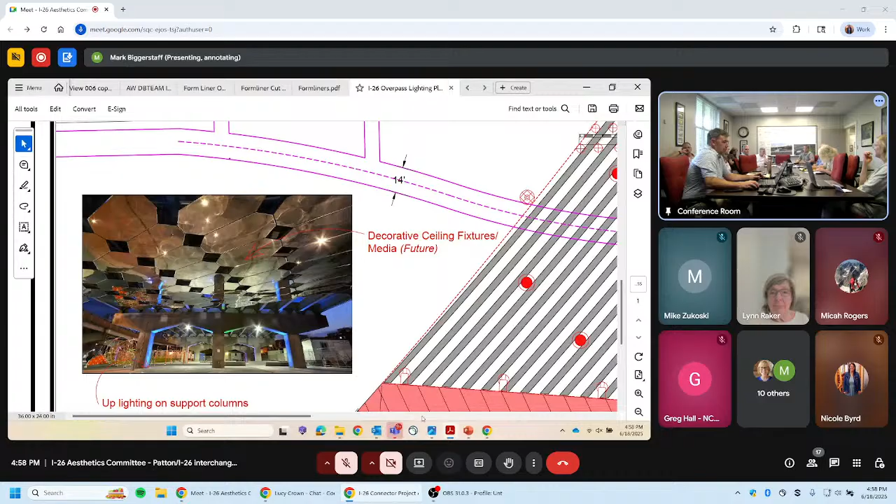Do you anticipate a long lag time between when that bridge is structurally up and the completion of the overall project, or will there be things going on in parallel so that things reach completion pretty much simultaneously? What kind of schedule are you guys looking at? That's the first bridge we're putting traffic on.

Okay, so yes, there's a delay to the completion of the project. Probably as long as a couple years, potentially. After the bridge is having traffic on it, does it make sense to hold off until the entire project is complete before allowing encroachment by the city?

Well, I think that goes back to what Chris said earlier, that it's case by case, we'd be able to look and see. We'd want to make sure there's nothing construction-wise that would damage any public art put in place until we're actually done. We wouldn't be doing the final surfacing of Patton until close to the end of the project.

So there's activities, hundreds of activities tied to what you're asking about. We'll put traffic on the bridge, but without looking at the schedule, and I agree with Nathan, it's at least 2 years probably from when traffic's on there to when we'd be final complete. That's just a ballpark guess. But there's a number of items associated with Patton and work along Patton, and when we install the lighting will get complete.

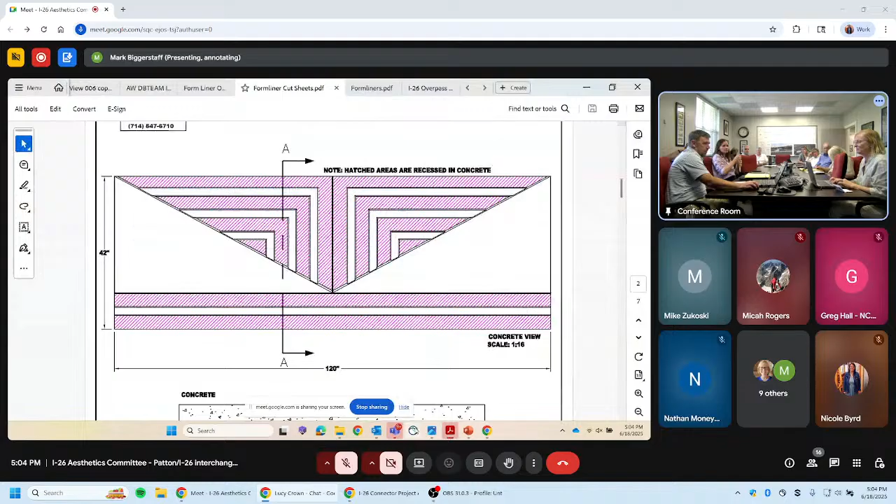Can we put that up just to see? I've got it in some of this. I'd sent this, I think Ted had some questions, I'd sent it to you, Ted, I think, just to kind of establish what those limits were.

That's basically what was estimated, going from 14 foot per plan to 18 foot, to accommodate the cycle track striping and an 8 foot pedestrian portion.

But even just that 4 foot does kind of shift matches everything coming off the bridge then, right? It does, I can pull that typical up. It's not exactly because it doesn't match in total width, but on the bridge you have 2 4-foot bike lanes. There you have a 4-foot buffer, 2 4-foot bike lanes, and a 4-foot buffer between that bike lane and the barrier on the bridge, the inside barrier. So basically you can kind of see it striped, but that hatched area is a 4-foot buffer.

Then you have 4-foot bike lane, 4-foot bike lane, one for each direction. You got a 1-foot buffer, and then it's like 8.5 feet minimum. It's variable because the bridge width is variable, but the pedestrian portion is 8 foot at the narrowest. So that's where the 18 foot was decided on, is that it accommodates the 2 bike lanes, an 8-foot pedestrian portion, and a 1-foot buffer between them.

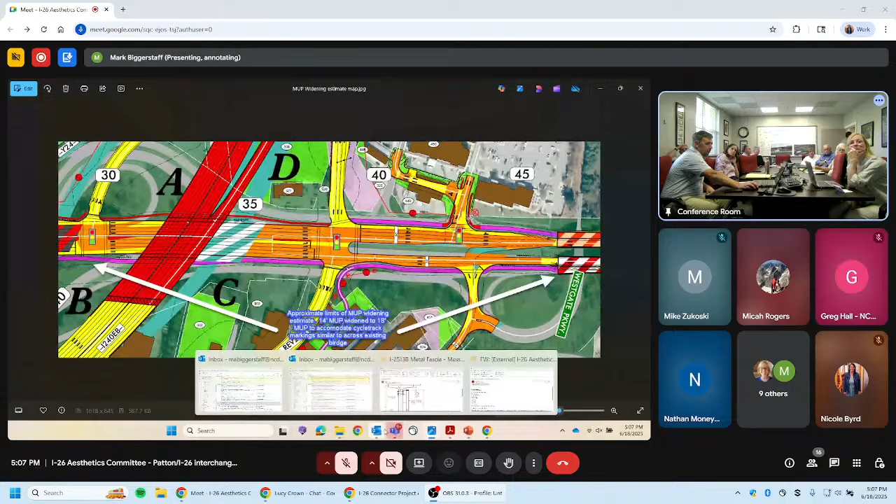Quick question on that, Mark, the 14 foot, how is that broken down? I don't have the section in front of me, so I forget what the spaces are for the bike and the ped, if it's just the 14 foot, not the 18. The 14 is not currently striped or any designation, it's true, just multi-use, 14 feet wide. Gotcha, thank you.

I think I read that the Greenway Committee has standards for the striping and the separation, even in a 14-foot. We don't have any striping standards. From the Greenway Committee? I read something.

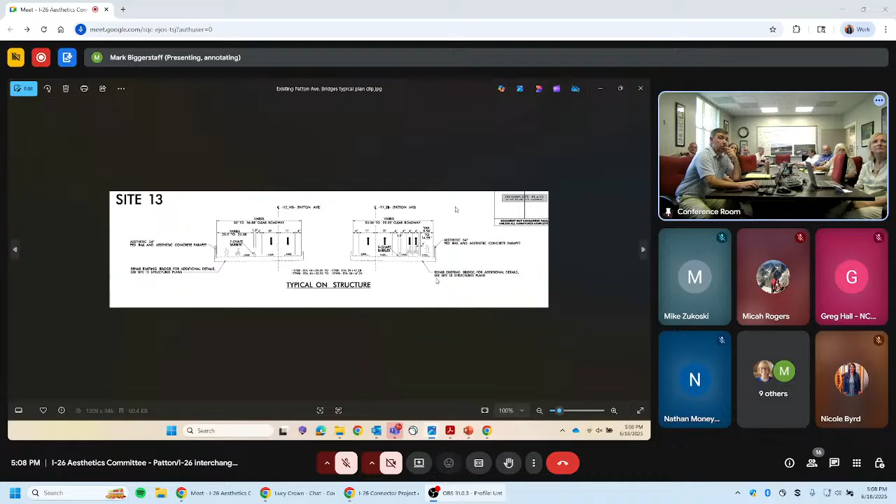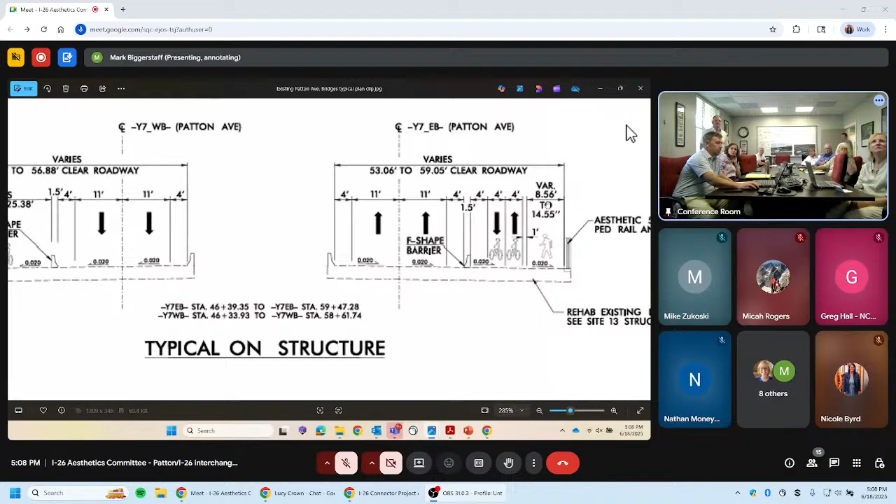And to your question on the planters, those are a later add by the city. We've got a detail for what they look like in the state's package that was approved. But they were lightweight concrete, intended to be movable.

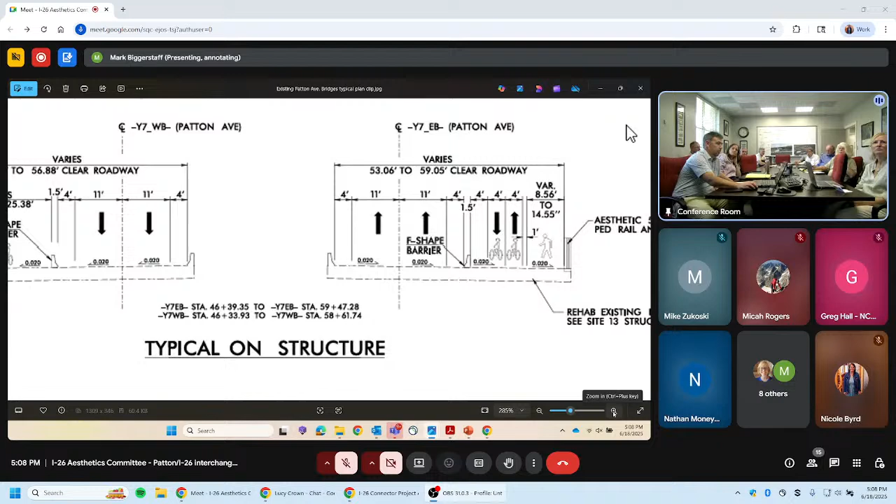So are they in the 4-foot buffer or are they out in the 8-foot pedestrian path? The document doesn't specify locations. To my recollection, somebody on the committee may remember better than I do, but they're identified as lightweight and movable. I believe they can be both, as in the wider areas of the pedestrian area there's intended to be some planters as well as some benches and seating areas.

Lynn, unless I'm incorrect, weren't we having some in both places? I believe that's correct, and ultimately that will be part of the landscape plan, because those planters will be paid for with the landscape allocation.

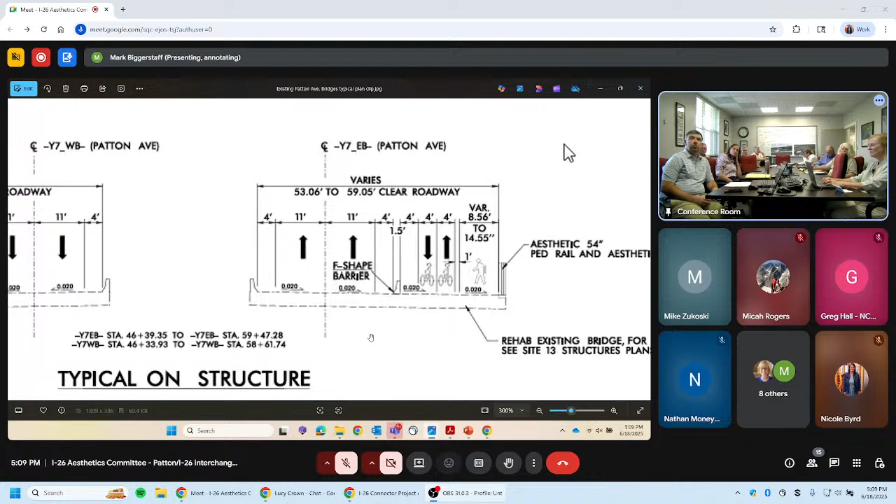Mark, I just want to be clear on what decision you need from the committee - is it the pathway of the MUP, so that the pole lighting knows where it's supposed to go? So it's primarily, is that MUP getting wider for that distance? Because there's not automatically room for it to get wider - we have to make room within right of way and utility designs. That's what makes it important to decide now.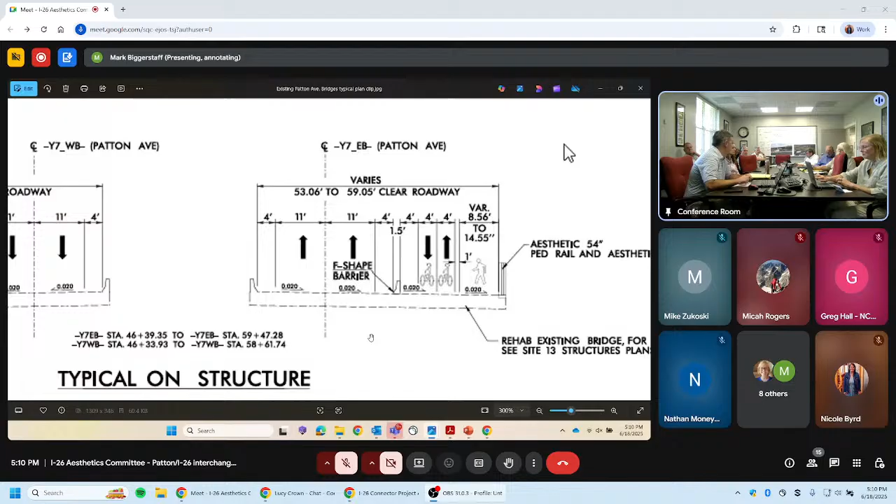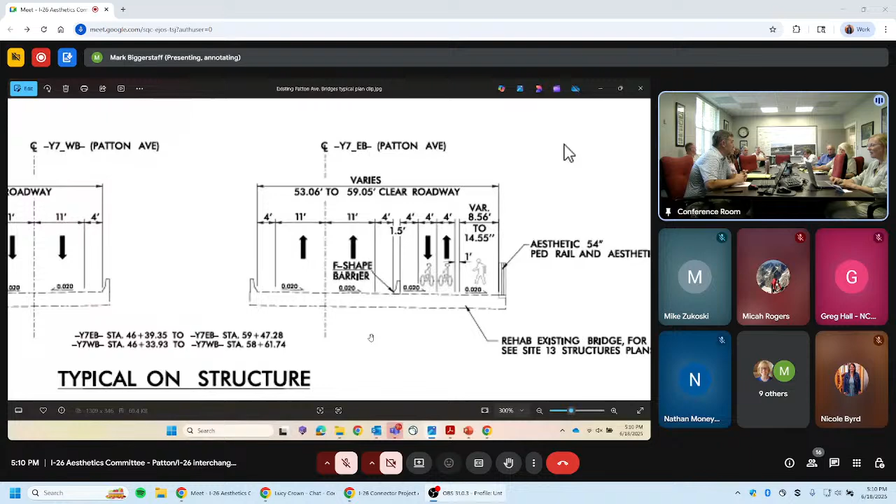It's going to cause some redesign and other issues. When you say now, do you mean this meeting, or can it go to the next meeting? You can go to next meeting - as soon as you can give us an answer, the better, I guess, is where we are on that. It's within the context of the budget we have to spend.

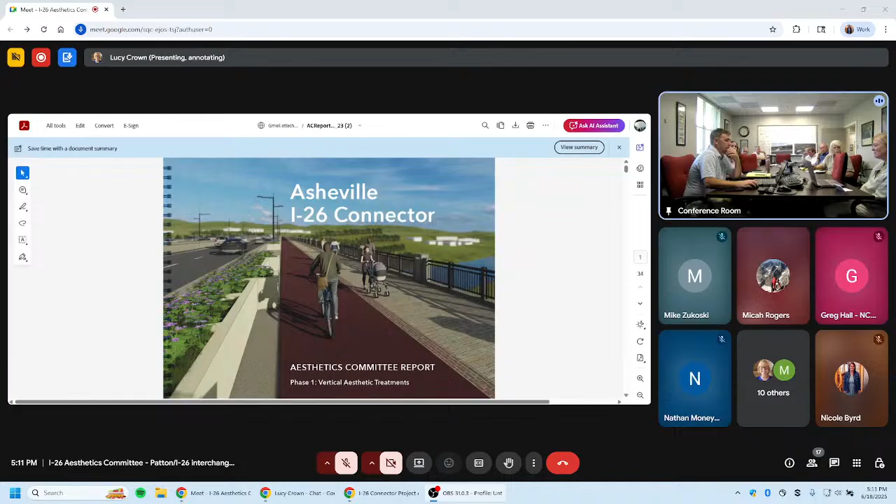And I will say, just as a biker and a landscape architect, striping the paths and designating areas between pedestrians and bikes increases safety exponentially. So I would definitely, as a local person, encourage the committee to consider widening it if that is a possibility through that section.

Yeah, 4 feet is really tight. That's going to be a really heavily trafficked area. Like the other parts of the MUP that run more along the neighborhoods and near Haywood aren't as big of a concern to me, but this section coming right off the Bowen Bridge heading towards Patton is going to be heavily trafficked.

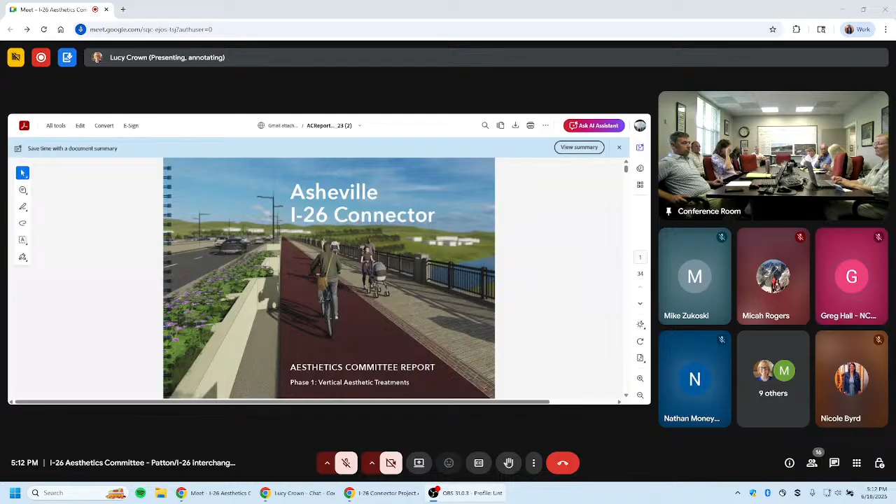You also have to consider - 4 foot is designing for analog bicycle use, and it doesn't really take into account light mobility. So you're going to have people needing to pass one another, and 4 feet isn't going to allow for that movement. What kind of minimums would there be?

Unfortunately, competing for space is that along the bridge, people are going to be wanting to stop and look over, take pictures, mill about, as opposed to just using it as a transportation corridor. So I think there's going to be more people loitering and enjoying the bridge and the views than in some of the other locations, so the space in that area is going to be at a premium.

I had a question about the drawing, the plan that you showed earlier between the Bowen Bridge and the highway. You showed the MUP parallel to Patton Avenue. You need to make sure you show the locations of the 3 monuments so the MUP is on the other side of that. That's also important for grading, to make sure the grading is at least as high as the curb, if not higher, toward Patton, so we don't end up with the monuments having a lower base than the roadway.